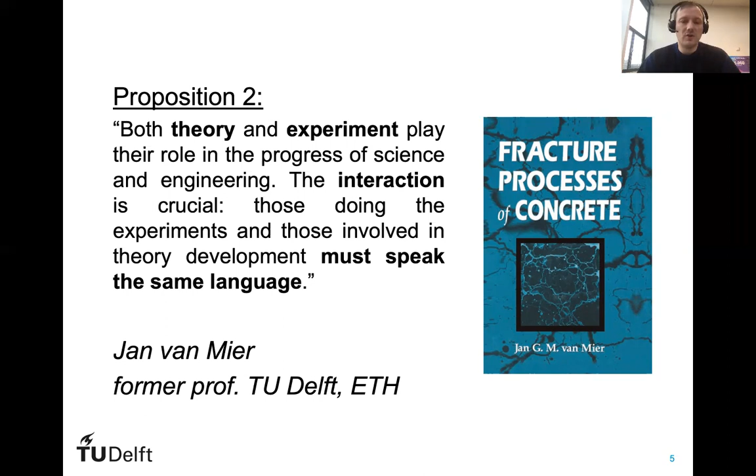Preferably, the same people should be doing both experiments and simulations, because the synergy of the two will help us understand our materials the best.

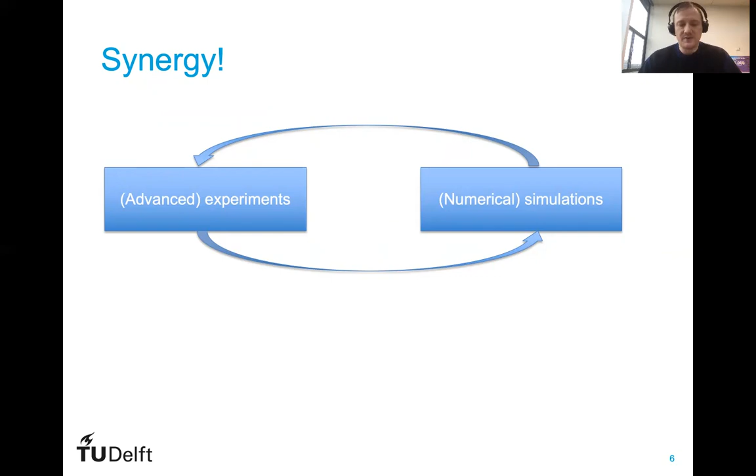This synergy between experiments, sometimes advanced experiments, and mostly numerical simulations can help us create new materials and ultimately better and safer structures. Of course, we should not forget experience, using empirical parameters and safety factors that we have learned in the past 100 or so years in civil engineering.

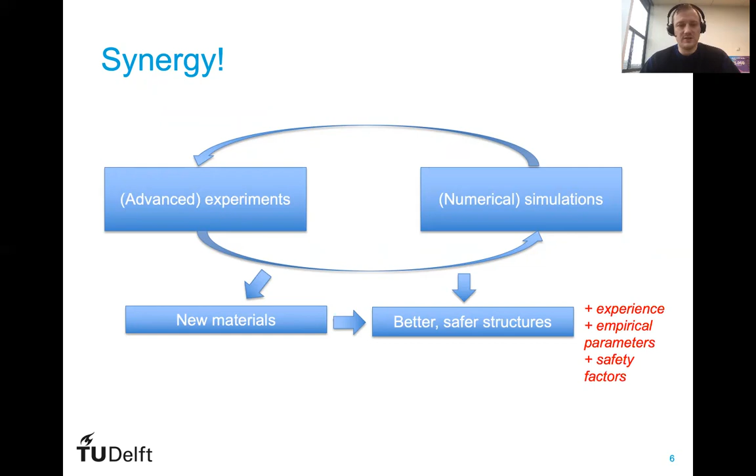Here I would like to introduce a class of models that we use quite extensively at Delft, and that will be discussed in more detail in this presentation: a class of lattice models. These models were introduced in the 1940s by Hrennikoff, who suggested discretizing a continuum with lattice of truss elements. If you make these trusses infinitesimally small, we obtain an exact solution for the deformation of the body. The first truss proposed by Hrennikoff had a limit Poisson's ratio of 1/3.

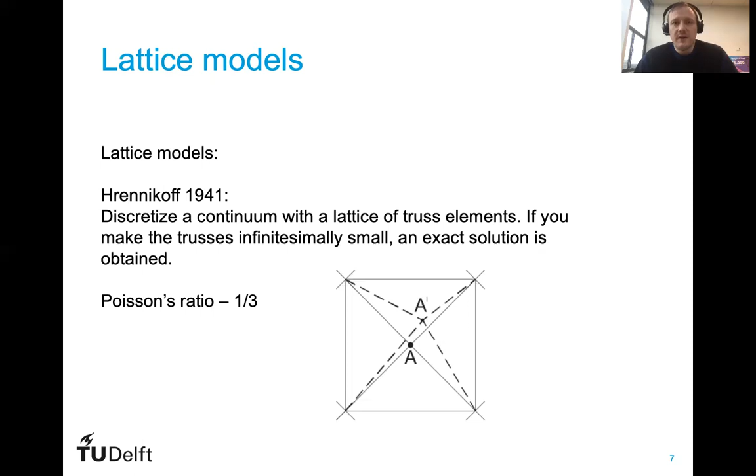Based on this, you can already see what the problem was in the 1940s. You would need very small elements, and this was not possible until computation power increased significantly. So the models were not much in use until around 1990, when people from theoretical physics adopted them to study fracture of disordered media. This was very nice for people working with concrete, because concrete is a disordered medium.

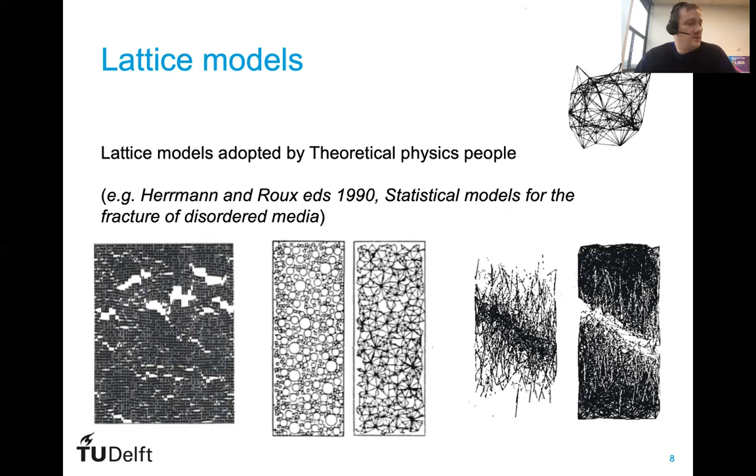So what is the principle of the lattice model used, especially the one we use at TU Delft? The general procedure is as follows: first, we discretize the continuum as a network of beams or spring elements. Then we implement disorder in a certain way that we'll discuss later. Then we apply external load or deformation.

We assume each element has an ideally brittle behavior, so it has a linear relation between stress and strain, and works in a brittle way. We then perform a linear elastic analysis of the whole system. We calculate stresses in all beams, and identify the beam with the maximum stress-to-strength ratio. This beam is then removed from the mesh, thereby creating a small crack. After that, we relax displacements and repeat the whole procedure, removing the following beam. This way, we can simulate crack growth in our cementitious material.

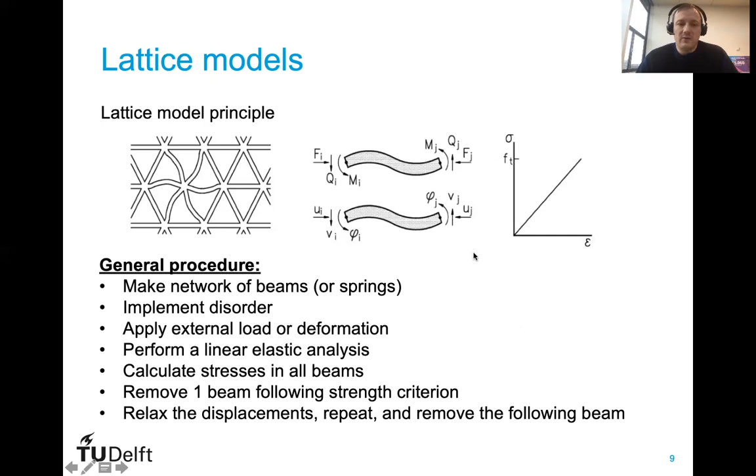In 2D, here is how it is related: we relate the forces at the beam ends to the stiffness matrix and to the displacement of beam ends. For a simple triangular lattice, we can also analytically relate the parameters with the bulk modulus, the shear modulus, and the Poisson's ratio.

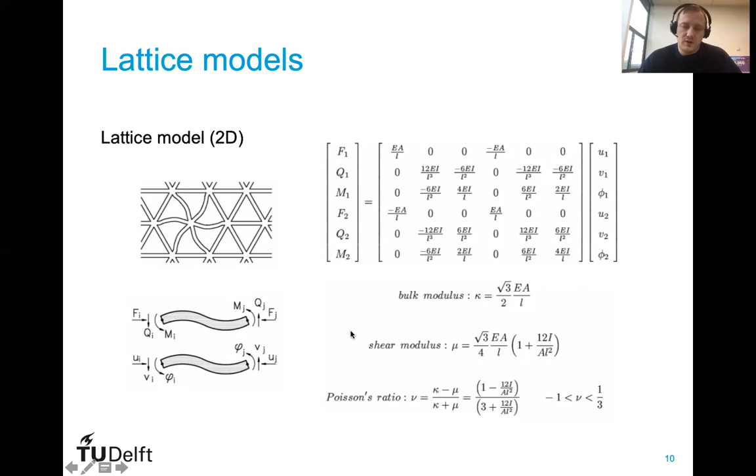However, concrete is a heterogeneous material, and heterogeneity can be implemented in lattice models in different ways. For example, we can generate the particle structure of our material using a Fuller distribution, and then use this as a basis for formulating our lattice.

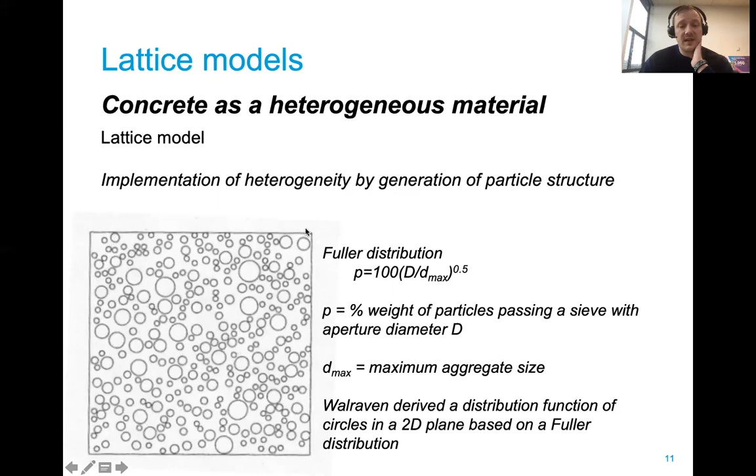How do we do that? We simply overlay our lattice on top of a material structure and assign different properties to different beams. If both beam ends are within an aggregate particle, we assign it the material properties of an aggregate. If both beam ends are within the matrix, we assign them the matrix properties. And the mixed beams have properties of the bond. This way we can assign different mechanical properties to different parts of our model.

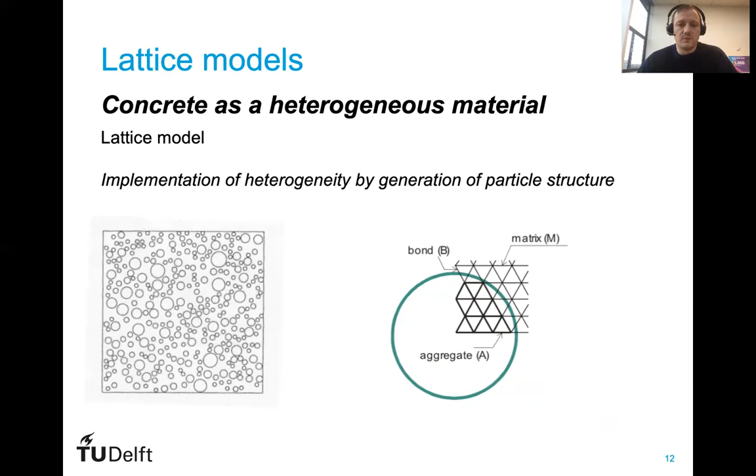How do we use models to understand the behavior of cementitious materials? We frequently talk about concrete as a multi-scale material. According to Wittmann, concrete can be seen as a 3-scale material: microscale, where we can distinguish different hydrates embedded in the cement paste together with capillary porosity and unhydrated particles - of course we can also go lower to the nanoscale, but we will not do that in this presentation - the mesoscale, which is roughly the scale of mortar, where we can distinguish aggregate particles embedded in the cementitious matrix, and concrete scale, or a continuum scale, where we assume concrete is an isotropic and homogeneous material.

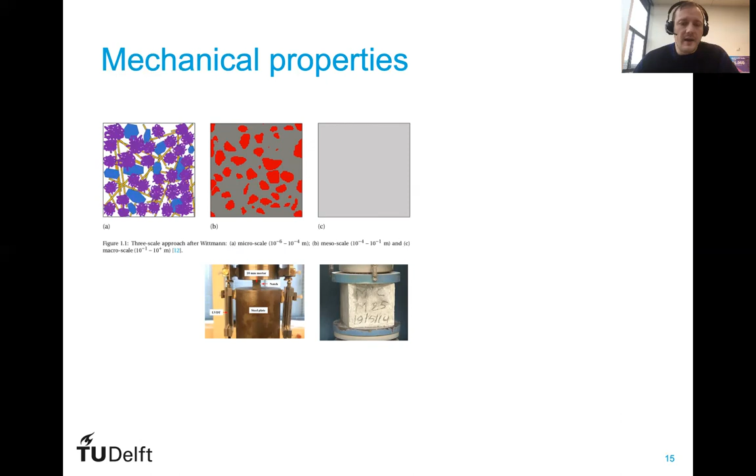This is actually at the concrete scale where we do most of our testing. We test our compressive strength, our flexural strength, assuming that concrete has certain homogeneous properties at this scale. We can also do similar tests in a bit more difficult way at the mortar scale, making smaller specimens where we can still test compressive strength, tensile strength, and similar properties.

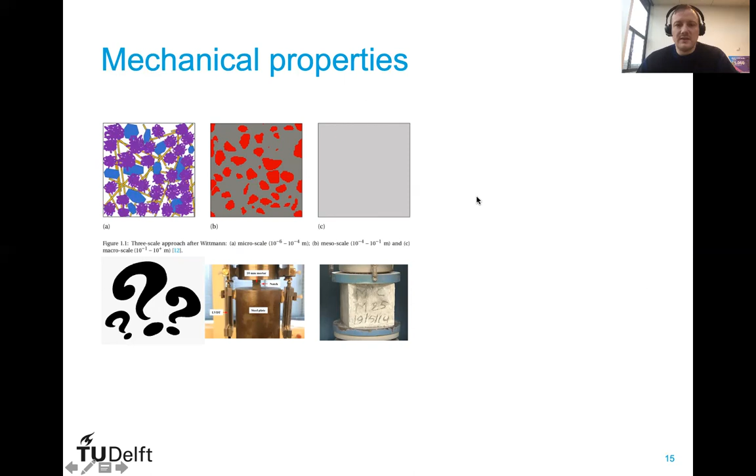But what do we do at the cement hydrate scale? How do we determine properties of these individual phases at the cement hydrate scale? Classically, in the past 20 or so years, people have been using nanoindentation, statistical nanoindentation for example, to determine the properties of different phases in hardened cement paste.

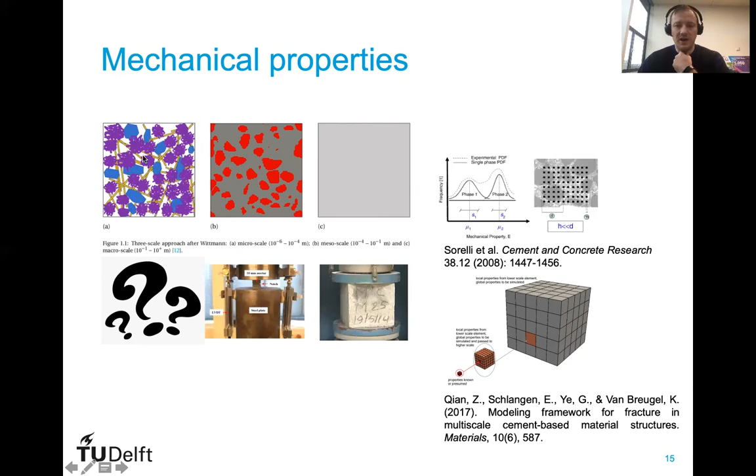What we get from nanoindentation is the elastic moduli of different phases, but we don't get the strength properties. On the other hand, at Delft, a colleague of mine developed a multi-scale modeling framework already some years ago, whereby we would be able to go from the microscale all the way to the macroscale by passing properties calculated at lower scales. However, for this, we need reliable estimates of properties of different hydration phases at very small scale, which is generally not available.

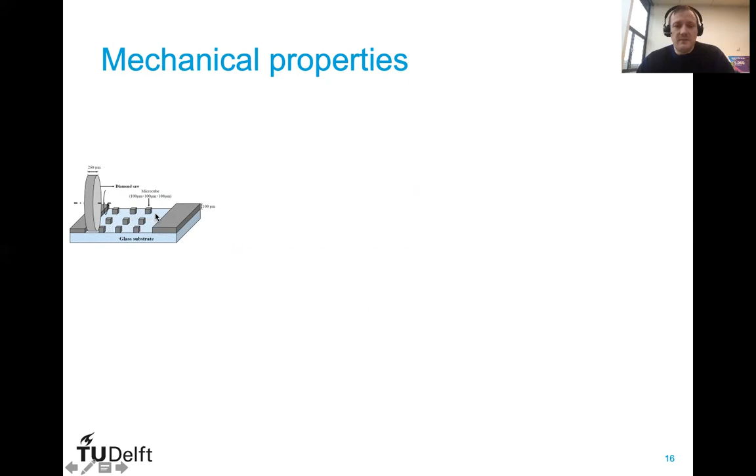So in Delft, we developed a technique for creating very small specimens, a so-called microdicing technique. We make a thin specimen, sort of a thin section of 100 micrometer thickness, that we dice in 2 directions, and then create an array of microbeams. These beams can then be tested. This is how they look under an electron microscope.

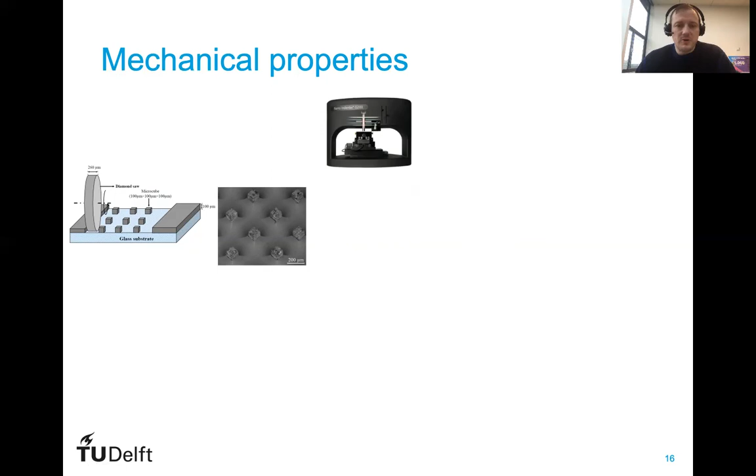We test them using a nanoindenter, and we can load them, measure the load and displacement, and measure the total force needed to break these specimens. Under a Berkovich indenter, this is what our fracture process of this small microcube looks like, and we get load displacement curves for these beams. The displacement in this regime is where the indenter catastrophically breaks the specimen, but the first part gives us the stiffness and the strength of these microcubes.

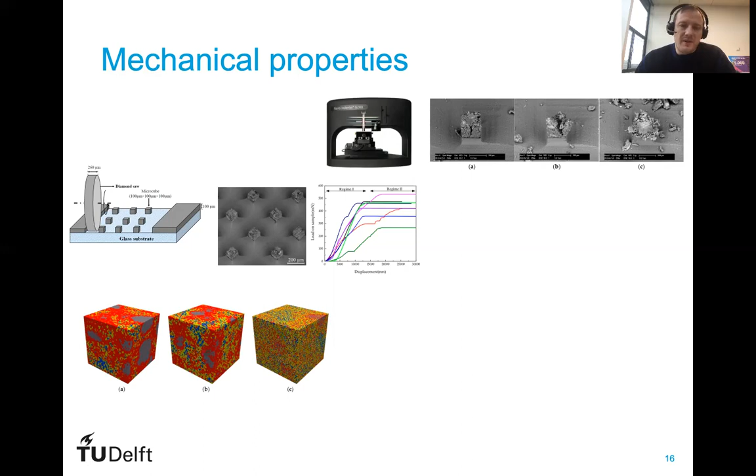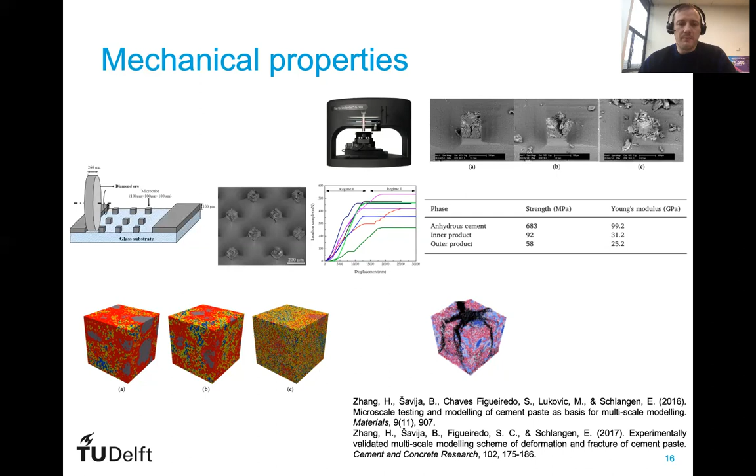However, this still doesn't give us properties of individual phases. So here we use numerical models to do inverse analysis and estimate the properties of different phases. We created models with different water cement ratios, and simulated them using the same loading and boundary conditions as given in the experiment. With that, we could estimate the strength of different phases in our cementitious matrix. The stiffness we already knew from nanoindentation, so we had only one unknown. Assuming that the ratio between strength and stiffness is constant for different phases, we were able to estimate properties of different phases in the cementitious matrix.

However, apart from the matrix, we also have an ITZ in our cementitious matrix. Using a similar technique, we created microcantilevers that contain part of an aggregate at the bottom and part of the cement paste at the top. These microbeam specimens were then loaded in flexure, and with that, we could calculate or measure the strength of the interfacial transition zone.

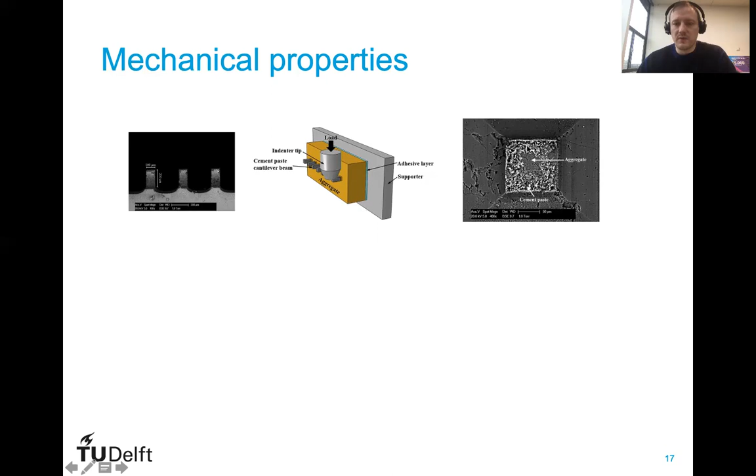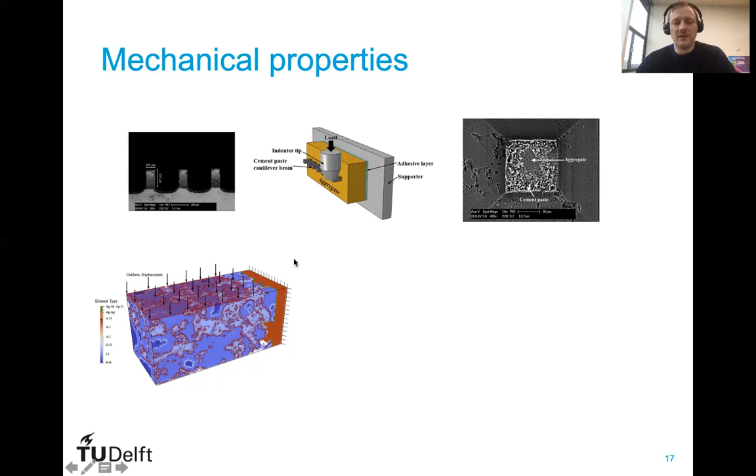We can also observe the fracture surface, which has some debris from the hydration products that have precipitated onto the aggregate particle. We could then use our lattice model to simulate the same process, and from that calculate back the properties of these contact elements between our lattice mesh of the paste and our aggregates. This gives us all the properties needed to simulate mortar at the following scale. So we calculated properties of hydrated cement phases, and from that we can estimate the properties of the cement paste.

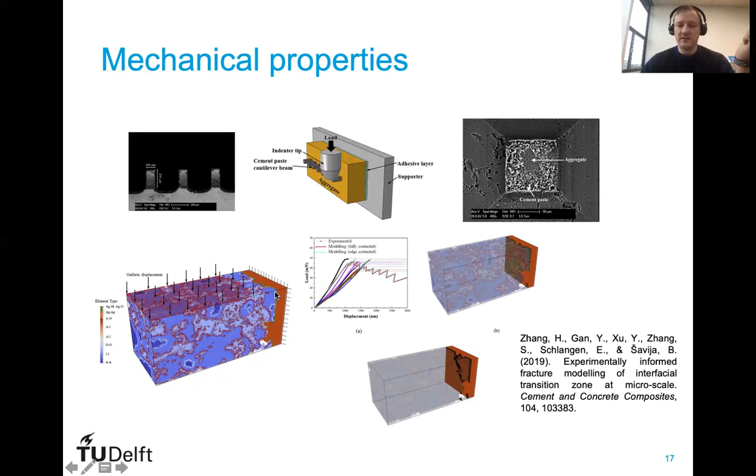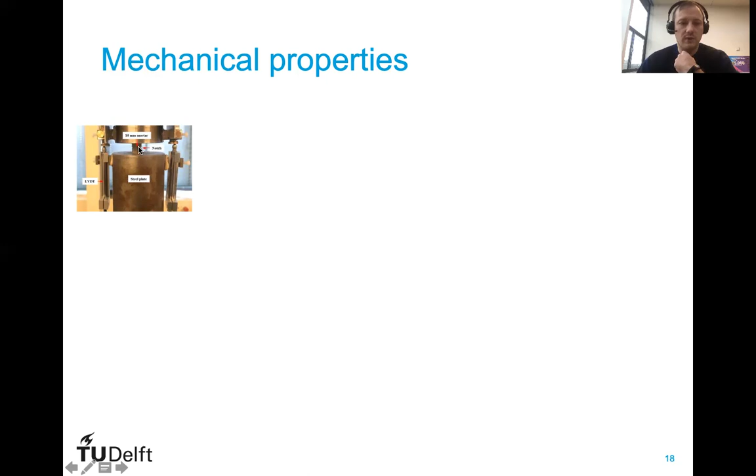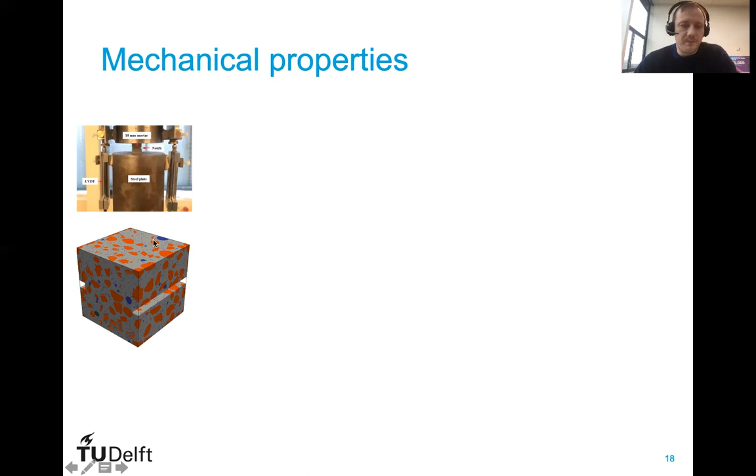We have the properties of the ITZ, which gives us the basis to simulate mechanical properties of mortar on the following scale. So we performed experiments on very small mortar specimens of 10 by 10 by 10 millimeters with a notch and with controlled grain size, so we can easily discretize it using our model. We simulate the same experiments with embedded aggregate particles in a cementitious matrix, and using computed tomography, we could also get the air voids and put them in our model.

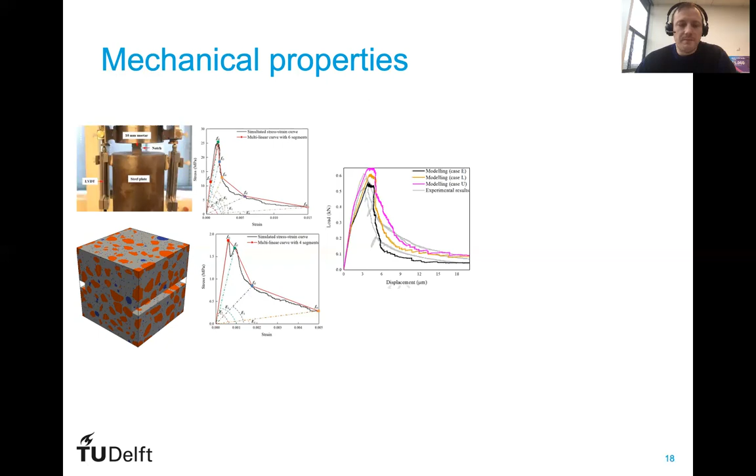Also in terms of crack path - this is how a crack looks in the experiment, where we have a tortuous crack path coming from the notch. The same thing happens in our simulations, where we have cracks going around the aggregates, since the interfaces are the weakest links, but also getting a tortuous crack path similar to the experiments.

What is important to notice is that in this case we started from the micro scale. We measured only at the micro scale, and on upscaling we didn't do any calibration, any fitting, or add any empirical parameters to get a better match between experiments and simulations. This presents an experimental and numerical framework for multi-scale modeling of mechanical properties of cementitious materials that can be easily repeated for different properties, for different matrices, with different additives, such as nanoparticles, and so on.

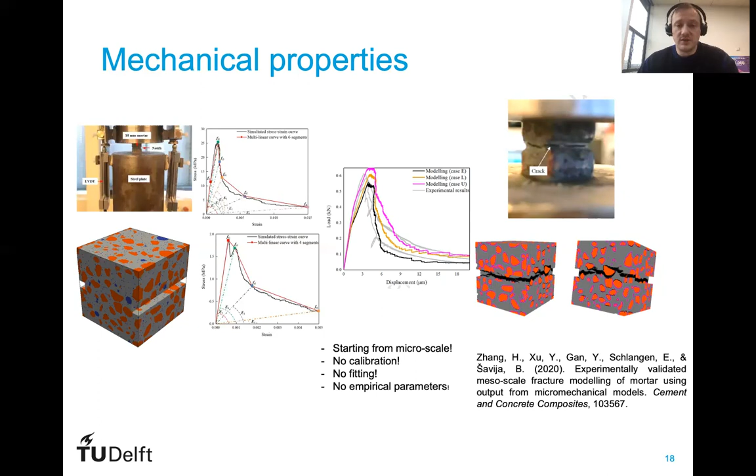We have then expanded this framework to simulate also time-dependent phenomena in cementitious materials. A first example I will show here is creep. As we know, cement paste is a sort of viscoelastic material that has increasing deformation with constant load over time.

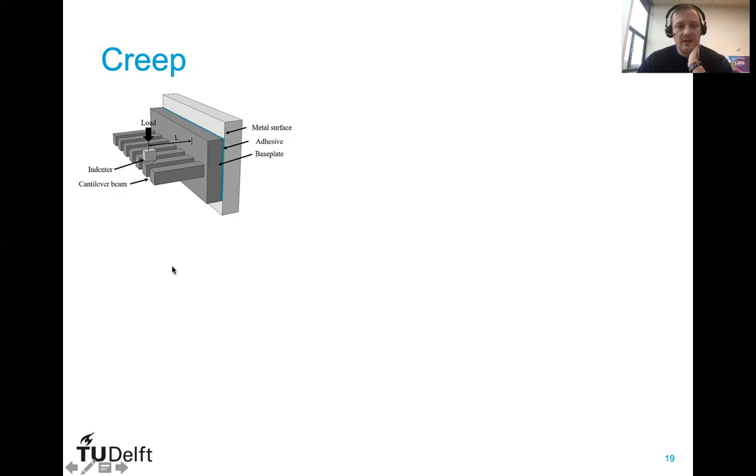We use the same framework, same experiment. So we have cementitious matrix specimens cut here in the form of cantilevers, which we then load using a nanoindenter. We also created small specimens that were scanned using X-ray CT, and from there we can easily segment different phases within the cementitious matrix and use that as input for our simulation. So for different water-cement ratios, with segmentation procedures, we could generate inputs for our numerical model of creep.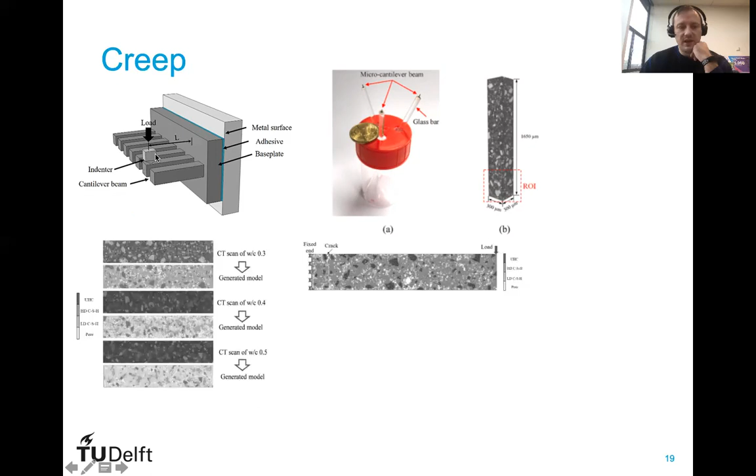So we have experiments of creep, we developed a numerical model of creep, and we simply repeat the same thing: here we have a cantilever loaded at the tip, same as in the experiments. I will not go into detail how this was done, but in this publication you see how we get an excellent match between calculated and measured specific creep compliance in pastes with different water-cement ratios.

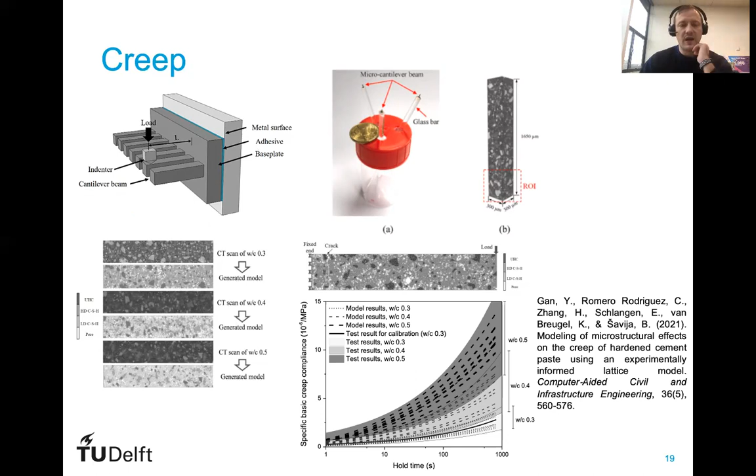So the experimental and modeling framework has been expanded also to include creep. Another phenomenon we looked at is fatigue - the phenomenon of increasing damage with repeated loading in the cementitious matrix. So we repeated the same procedure, where we scanned micro cantilever beams.

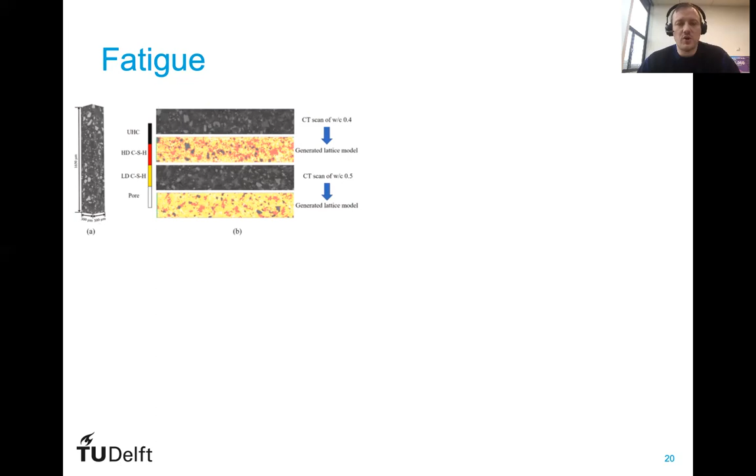We also tested them using the same approach as shown before, and for different water-cement ratios we generated different microstructures for the model. In this case, we needed a bit more complex constitutive law where we needed to include increasing damage in the matrix with load repetition, and also unloading damages.

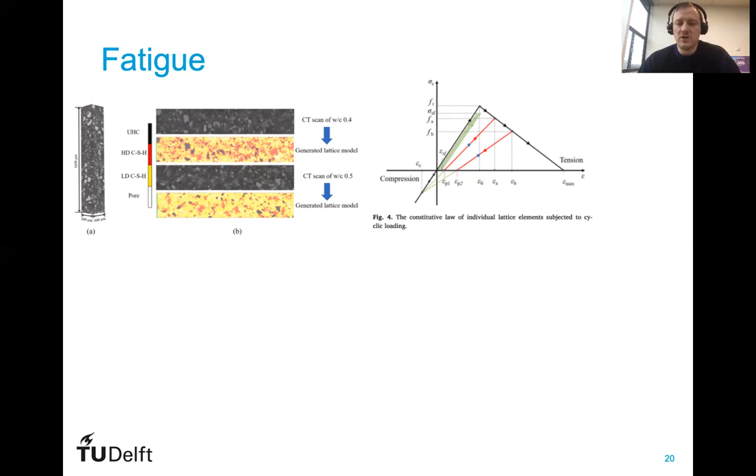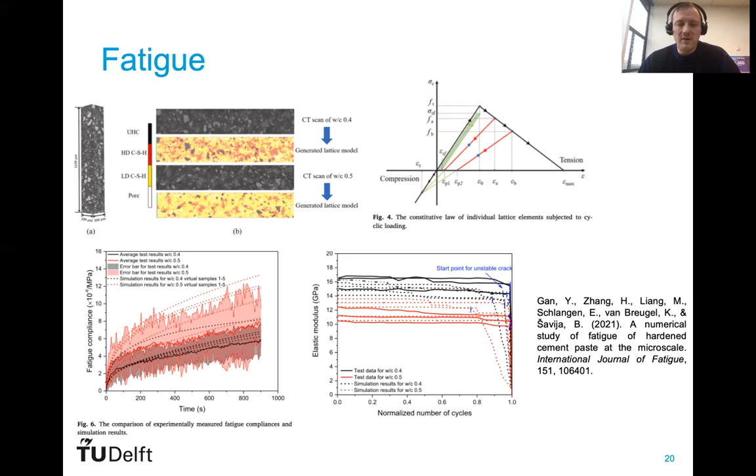With this approach, we're also able to simulate the fatigue compliance for different water-cement ratios in our micro cantilevers. We also found that at the level of cement paste, the damage is very minor - very little change in the elastic modulus over a long time and many cycles, and then there is a sudden loss of elastic modulus and sudden damage. This was something we found very interesting experimentally, but we were also able to numerically explain how and why this happens.

So these models that I show here were physical models.

Furthermore, they were experimentally informed, so every model had experimental input and experimental validation. But in this day and age, maybe we can skip the physical modeling altogether and try to understand the behavior of our materials purely from data.

So we have been working on data-driven approaches using machine learning to understand behaviors of our materials. We have performed calculations and developed models that relate the mix design and compressive strength of concrete materials. There is a widely available data set that we use to train and validate our machine learning models, and we showed that different models can be used with different success to relate the mix design and the compressive strength.

What we also observed, which people usually don't report, is that if you change the data set and try to use your model on data it hasn't been trained on, with a different distribution, the model doesn't really work. So it is important to use the same distribution of data to train the model and to validate it later on. If you don't do that, the model will not be successful.

We also developed ensemble machine learning models to relate the mix design and different exposure conditions - time of loading, temperature, age, relative humidity, and so on - to the creep response.

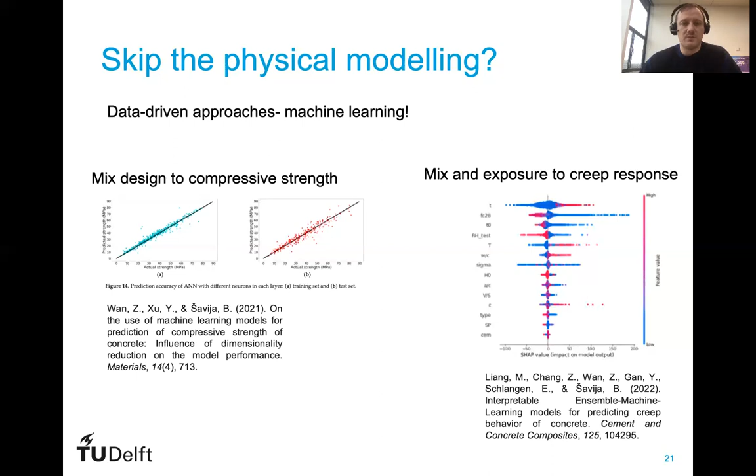Another approach we recently attempted was to predict properties of materials from microstructural images. We performed X-ray CT of cement paste, and based on this data we created a convolutional neural network which is able to predict the creep modulus only from the microstructure.

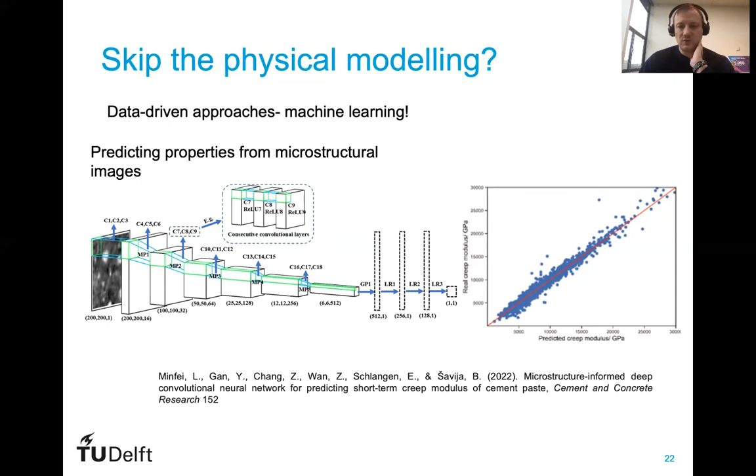Of course, for this we used the model I presented before for creep calculations. So we trained our network based on the modeling results, and then tested whether we could use this trained network to predict the creep modulus - and this worked very well. You can see more details in this recent publication.

So this was about understanding of cementitious materials. We can also use models to develop cementitious materials, and I will show a few examples in the coming slides.

In Delft, we have been working quite extensively with self-healing of concrete in different ways. What we see is that usually this process is very empirical - we understand how things work, but then we need to do a lot of experiments to get good behavior and optimize the material. We have recently developed a numerical model within the Lattice modeling framework that can help us design self-healing concretes with superabsorbent polymers.

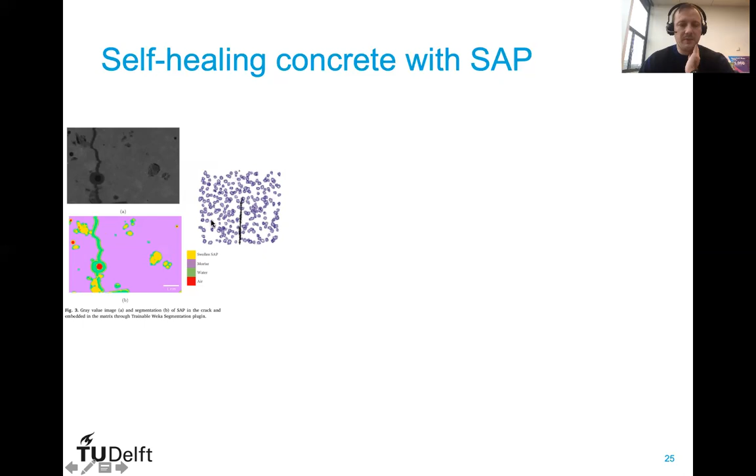We pack SAP particles inside of a box, and then simulate the cracking process. After that, we can simulate the healing process and the penetration of moisture. For different percentages of SAPs ranging from 0.5% to 1.5%, we see that our model is able to predict that less and less water saturation around the crack happens as we increase the SAP percentage, which is what we expect.

Furthermore, we can also examine how crack width influences the sealing of this concrete with SAP. We see that as we increase the crack width, we have more water penetration around the crack, even with the same amount of SAP. So there is a balance between how much SAP you need to put in and how big cracks you can heal.

And also in this publication, we provide nomograms so we can relate and design these materials for different input parameters, in terms of SAP percentage, swelling capacity, and the anticipated crack width.

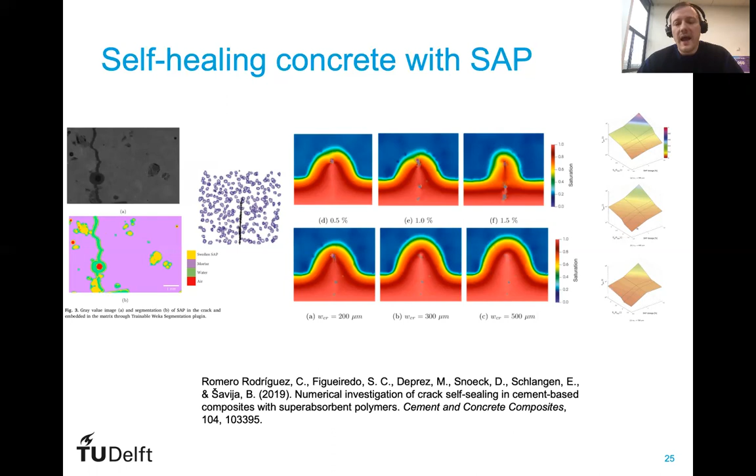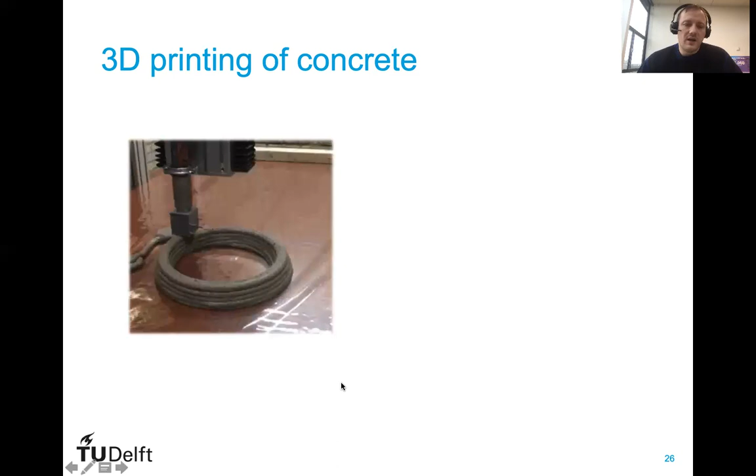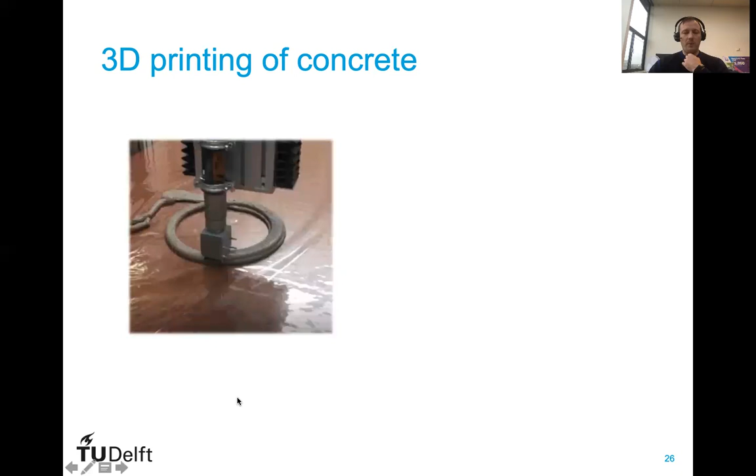We have also been working on 3D printing of concrete. Of course, a lot of people are working on that. So you have an extrusion-based process where you extrude layers of material on top of previous layers and try to build up a structure. However, as you see in this video, if the parameters are not done correctly, the structure will collapse. So what we need to be able to predict is at which point the structure will collapse in the fresh state, in order to optimize the printing process. So you see already some structures have been built using this technique.

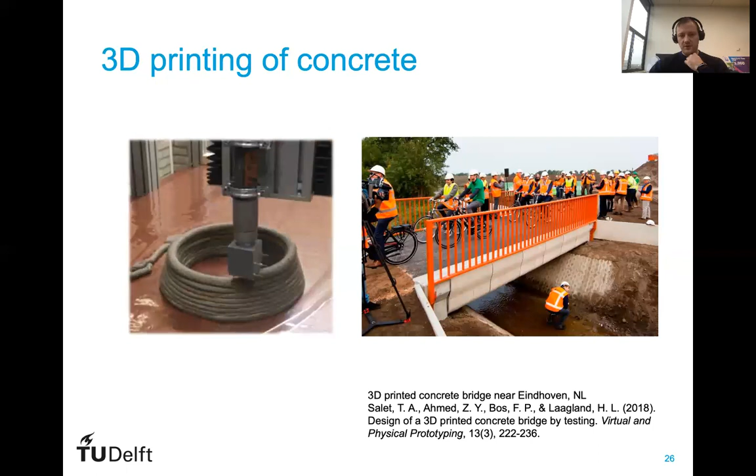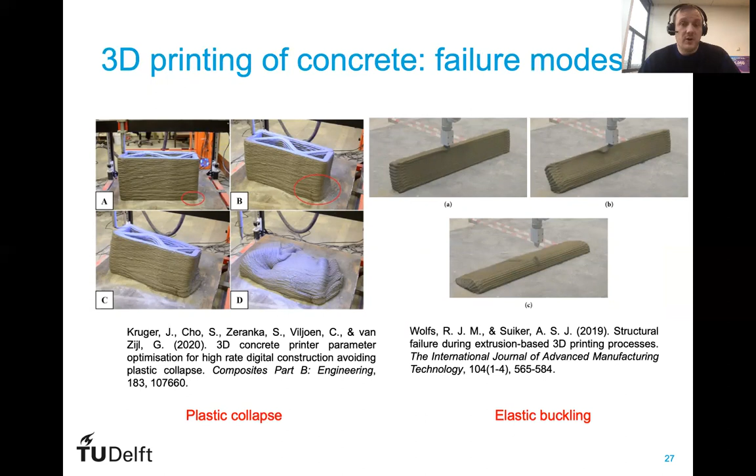It's not only a lab-based technique, there's really a lot of interest from academia, but also from industry in this. If you look at 3D printing of concrete, there are two basic failure modes. Plastic collapse, where usually a bottom layer of the printed structure cannot sustain the weight of the layers on top of it, and the structure collapses. And elastic buckling, where there is a loss of stability inside the print during the printing process, either due to imperfections or due to geometry. So actually, we should be able to simulate both of these failure mechanisms if we are to predict the buildability of cementitious materials and control the printing process.

A PhD student of ours has developed a numerical model in the Lattice modeling framework that is able to simulate the failure mode of plastic collapse. So we can predict at which point the structure will fail during printing, based on input parameters that are experimentally measured. The model has been validated against experimental data from the literature. Based on the geometry and on the material properties, we are able to predict at which point the print will fail during 3D printing.

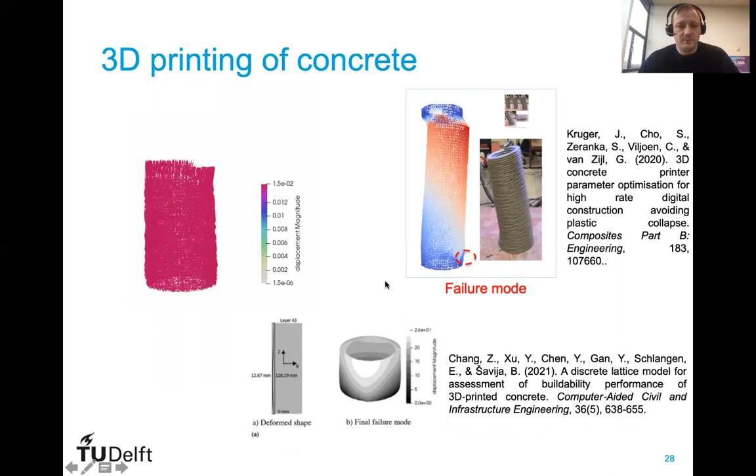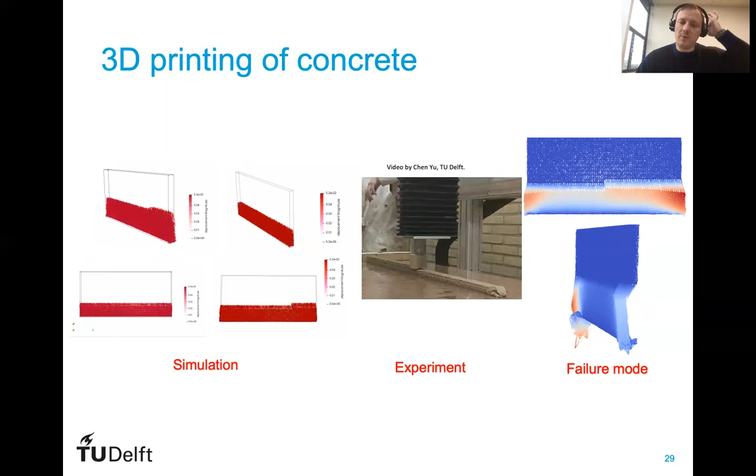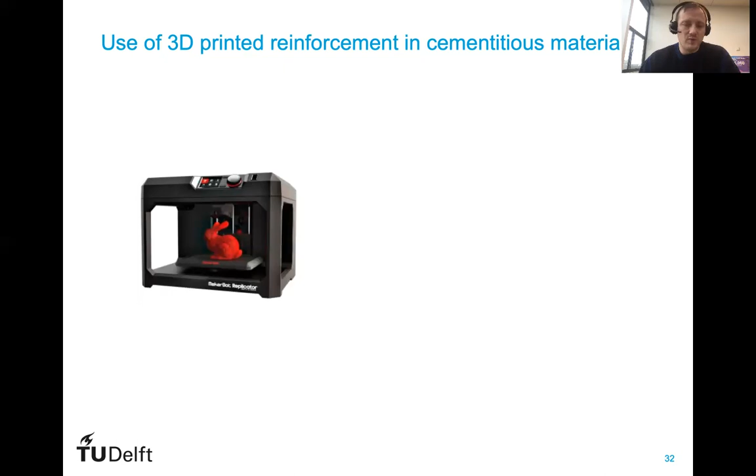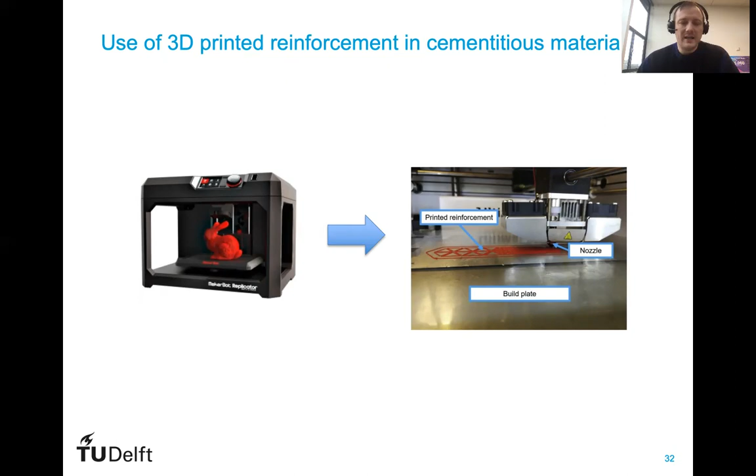Finally, looking at the design of construction materials and how we can use numerical models for the design of these materials, we have performed some studies on use of 3D printed reinforcement in cementitious materials. With 3D printing, we have enormous freedom in how we can design and fabricate the reinforcement. We use a 3D printer, and we can fabricate reinforcement of any shape or form that we want, of course within the limits of the printer that we have. But in principle, it offers much more freedom compared to traditional building processes.

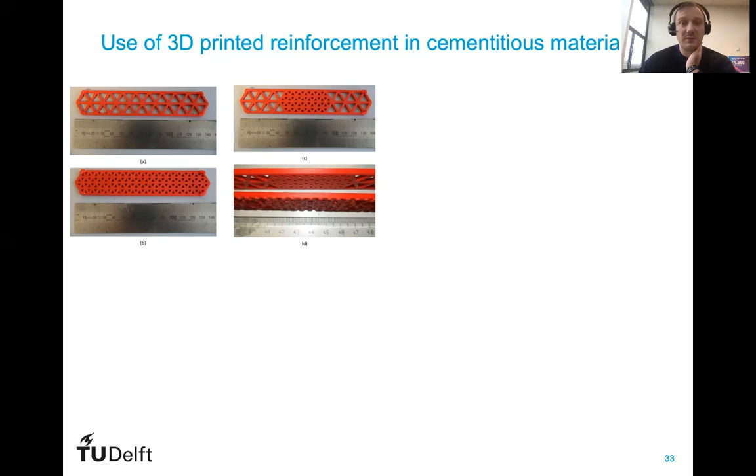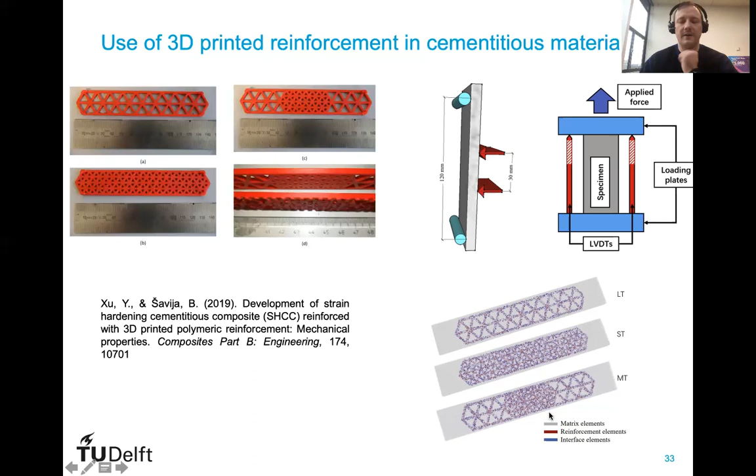What we did is design several very simple meshes in triangular shapes - what we call large triangles, mixed triangles, and small triangles. With 3D printing, you can also influence the roughness of the mesh, so you can build in edges similar to ribbed bar reinforcement to increase the bonding between the reinforcement and the matrix. We then cast these into mortar bars and tested them in 4-point bending, in flexure, and in uniaxial tension. Because the presentation is about the use of models, we have also created modeling representations within the Lattice modeling framework of all three of these different experiments.

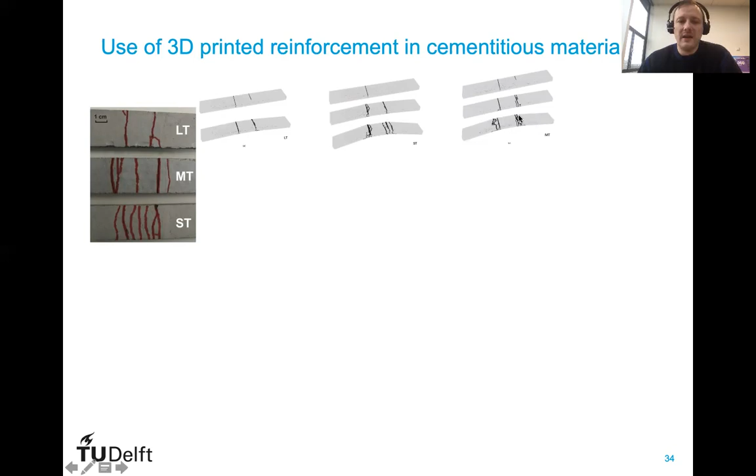Experimentally, we saw that with large triangles, we cannot really get multiple cracking and deflection hardening, but in 4-point bending we can do that with mixed triangles. We have an increased reinforcement density in the middle, sort of a functionally graded material, and with small triangles, if we increase the percentage of 3D printed reinforcement, we can get better behavior, and our simulations show that. This is for the large triangles. For the mixed triangles, we have multiple cracks inside the bending span, and for the small triangles as well.

In uniaxial tension, we see that this is our reference material, which is of course very brittle. With large triangles, we can have a few cracks, but they're mostly obtained by pull-out of the reinforcement. If we go to small triangles, and small triangles with ribs, we can get multiple cracking and actually very nice strain hardening behavior, similar to what you get, for example, in ECC materials.

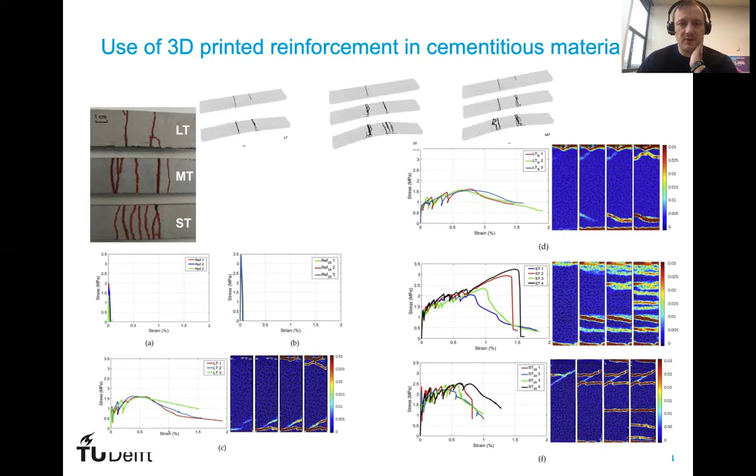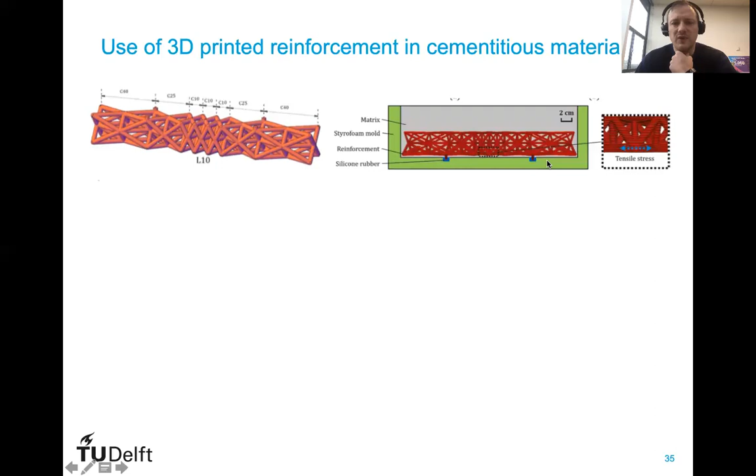What is important to keep in mind, and we sometimes forget, is that the 3D printing process we use, and that most people use, is FDM. In that process, there's also a print orientation, so depending on how you print, the material properties will be different. We keep that in mind when we print, but also in our numerical simulations.

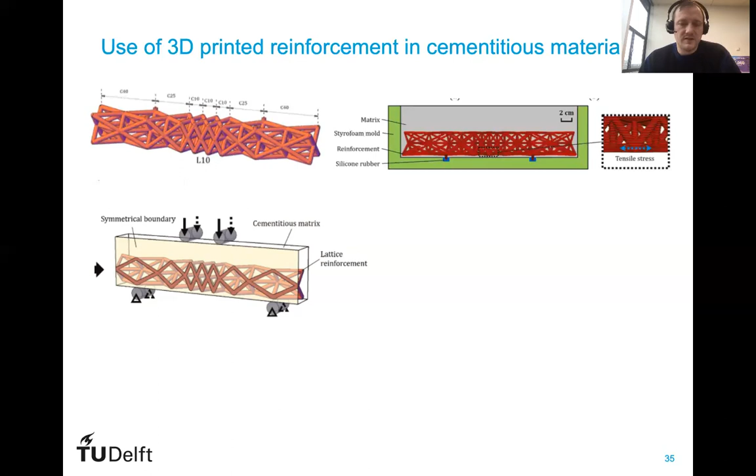So we created also a simulation of this 4-point bending experiment. We use symmetry to cut down on the computational load, and we use, in this case, Abaqus with a CDPM model to simulate the process of deformation and fracture in this material. We can also then vary the properties of the material.

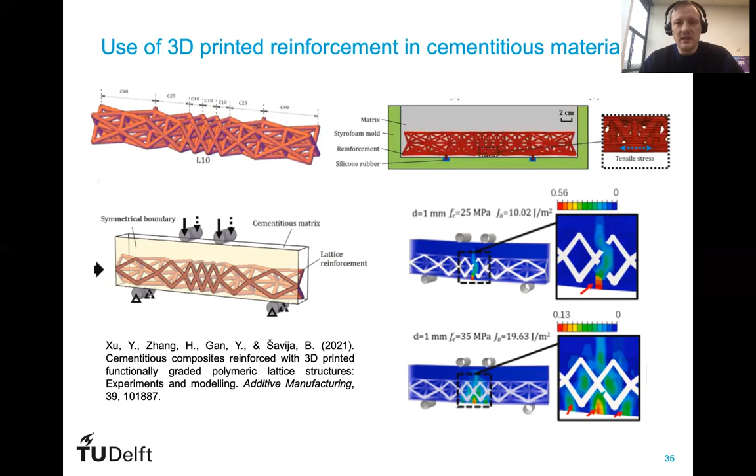We can say, okay, what happens if we change the reinforcement we can print and print a stiffer one or a stronger one? What we show is that if you adjust these properties, the stiffness and the strength of the reinforcement, you can also get multiple cracking inside of these materials. We showed that in terms of models. We were not able to achieve that in terms of experiments, but what we know now is in which direction we need to develop our design in order to get certain properties. So in this way, the models inform the experiments.

We have also done some work in development of auxetic cementitious composites. So what does this word auxetic mean? Conventional materials have a positive Poisson's ratio; when we compress them, they laterally expand. Auxetic materials are the opposite: when we compress them, they contract, so they have a negative Poisson's ratio. In certain applications, these properties are very useful.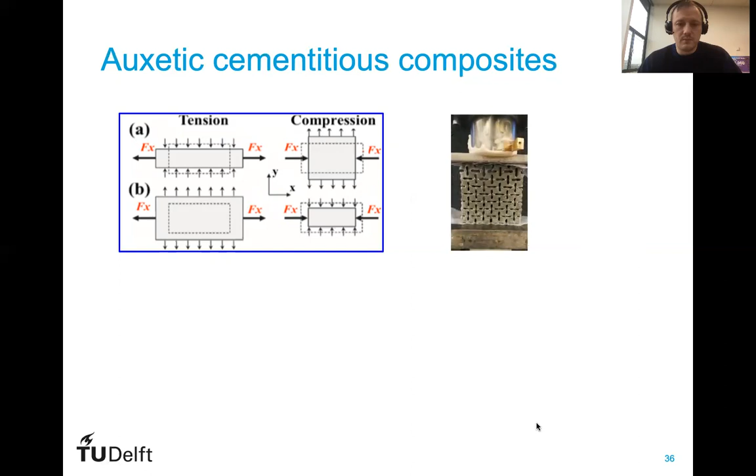However, the mechanism of auxeticity in cementitious materials is different than that of polymer materials, or rubber-like materials, that are commonly used in the literature. So we used, again here, CDPM, first to simulate the deformation and fracture process of the material, but more importantly, we used the model to understand why and how we can achieve this auxeticity.

What the model told us is that with elliptical shapes of these holes, we have stress concentrations at the tips of the ellipse. These stress concentrations cause microcracks that are then bridged by the fibers present in the matrix, and then they rotate. If we didn't use the fibers, the specimens would simply explode, which we also observed in some trials in the lab. So it is the fibers and the shape of the ellipses that allow this quasi-plastic behavior of these joints, and also the rotation that enables auxetic behavior of these materials.

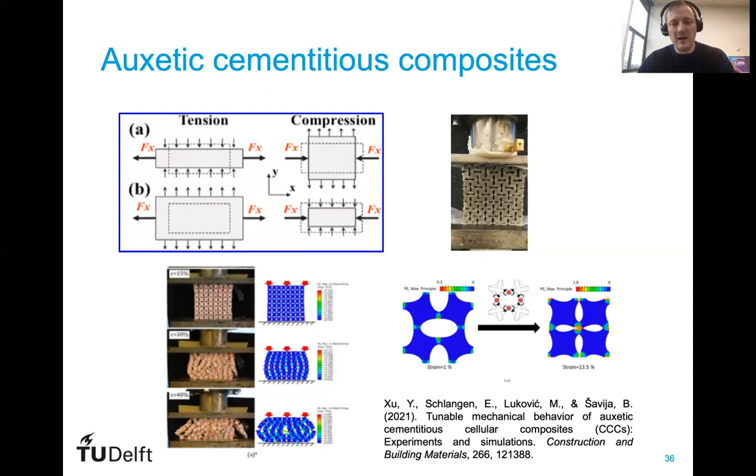This is very nice, that we can use models to explain behavior from the experiments. So finally, this leads me to some conclusions. First, realistic models can be used to complement and understand experimental observations.

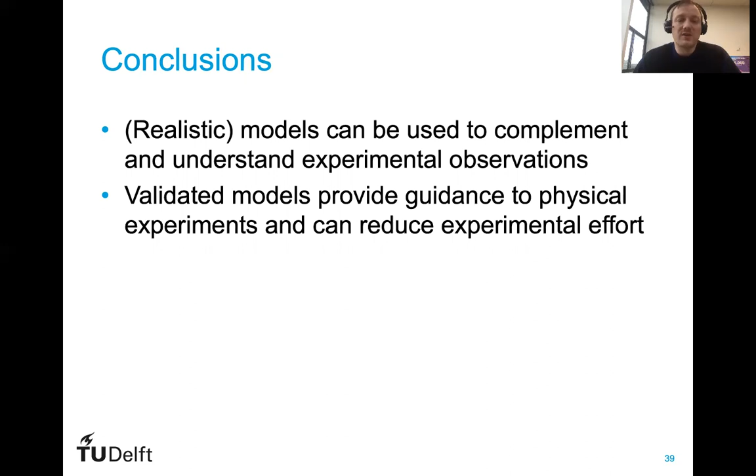We do not always have all the details in terms of the experiments that we perform, and if we have a model, sometimes we can see things that we don't observe that easily experimentally, and then we can understand better how our experiments work and how our materials work. Second, models that are validated can provide guidance to physical experiments and can reduce experimental efforts. So if we have a good model, we can use it to design experiments and therefore reduce our trial and error approaches. We have seen that in this presentation and in our work, for example, with self-healing materials.

Models can discover new materials. I didn't go into much detail, but what we saw in terms of the auxetic material is that if we can explain the behavior, we can use the models to fine-tune the behavior of these materials. So optimization and material discovery in principle is possible using numerical models.

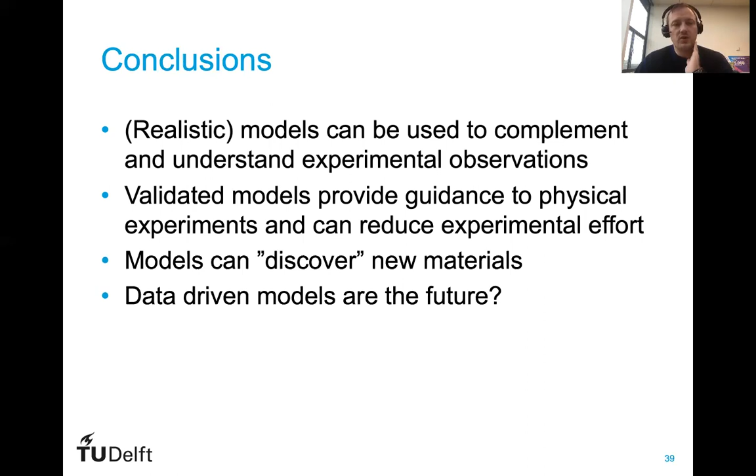And finally, I would like to conclude that perhaps we as a community should start looking into data-driven models, not only in terms of simple regression models, but also models for material development. Maybe these models represent the future in terms of the development of cementitious materials.